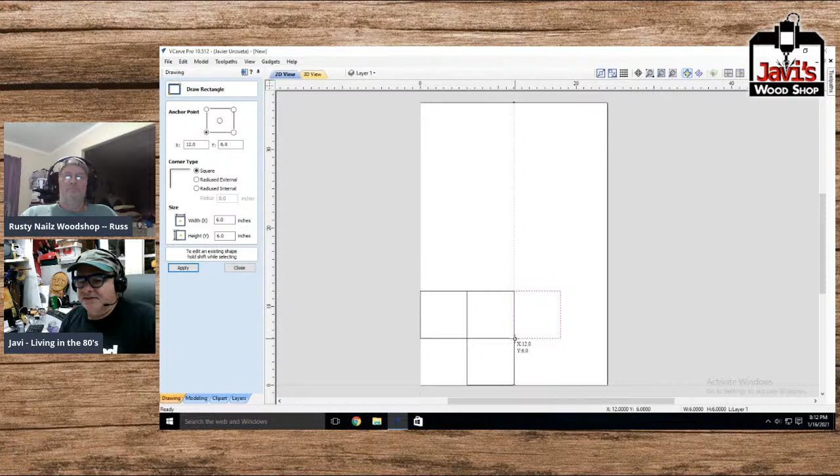And then another one here. And you know what, just to make it complete, I could do this one. This one is optional, by the way, the top one. Now, for those of you that have built boxes out of cardboard, you know all you have to do is fold these 4 up, and this one over here is the lid. Okay, so that's nice and simple.

Let's just get rid of this one because we're just doing a simple box. We'll worry about the lid later. Simple box, 4 sides on the outsides of the cross, and the centerpiece is really the bottom piece.

All right, now what are we going to do? We're going to do the following. We're going to create lines because I don't want to waste time carving out every single thing. So we're going to create a line from here, actually above here a little bit, all the way down to below here a little bit.

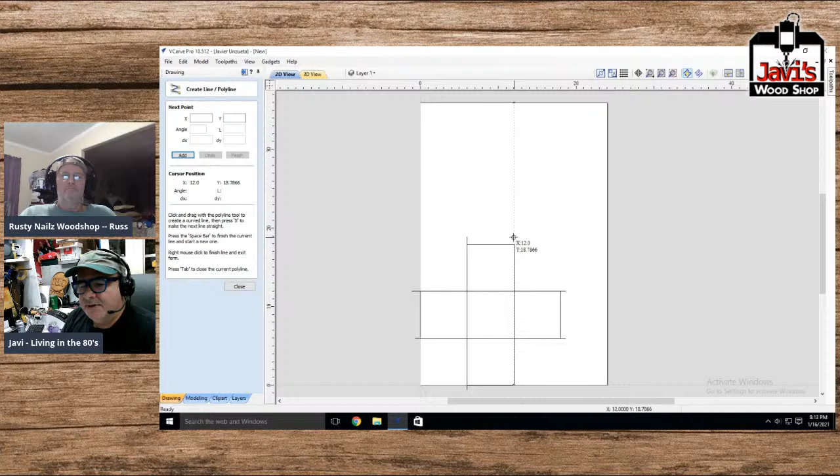And then hit the space bar, create another line from here to here. Space bar, a line from here to here. Space bar, a line from here straight down to here.

Now the reason I did these lines is the following. I'm going to select, I'm unselecting, by the way, the cubes. And I unselected lines by accident. Okay, I'm just selecting the 4 lines that we made.

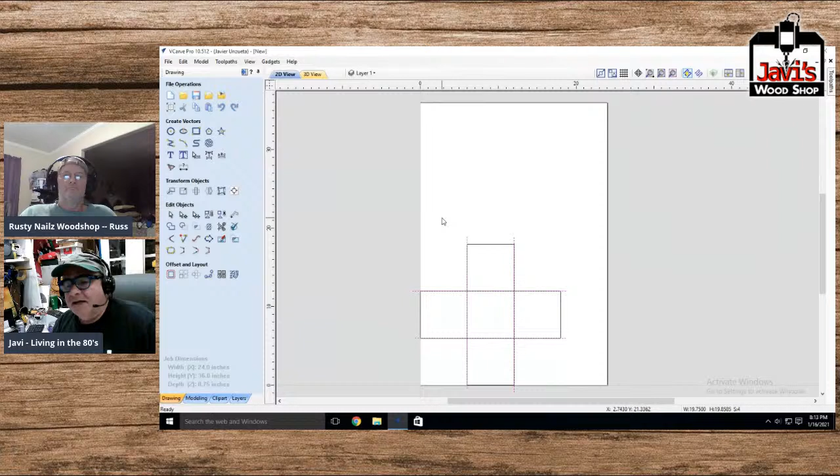You notice where they are, you can see them. Let me zoom in. Here we go, you can see the 4 lines cross the boxes here.

All right, so now let's go to the toolpath, and we'll start our first setup, which is, first of all, let me lock this down. Okay, we'll do a profile path.

And we're going to cut almost to the edge, to the end. We're not going to do a full depth of cut. We're going to do, let's say this was a 3/4 inch deep piece of wood, plywood.

Now we're going to go 0.72, let's say. 0.03 of an inch higher. It depends how precise your equipment is.

And I'm going to do on the line. All right, I'm going to do on the line. I'm not worried about the passes right now. We could do this in one pass, but I am going to choose the V bit.

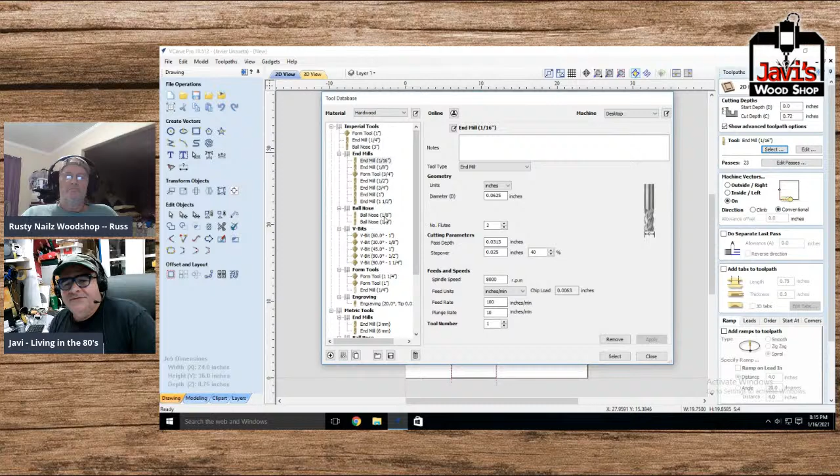And it's going to be the 90-degree V bit. Now I had a 90-degree. Oh, here, this is a 1.25 inch. I have a nice big wide one there. Okay, so there's our 90-degree V bit, and here's what it'll look like.

Calculate and reset preview. Preview all toolpaths. Boom. You'll notice that right now, if this were cut out, I could fold this up, fold this up, fold this in, fold this over.

And there's just enough here on the edges, just enough here on these edges of this bottom piece that I could just, if you're careful.

Now, what I would recommend is underneath the 4 lines of the edges, put a piece of blue tape. Line some glue right here, and then put some glue on the top edges, just on one side. So you could do the 2 vertical lines all the way up and down, and then just the inside horizontals. Then you could actually fold up the pieces.

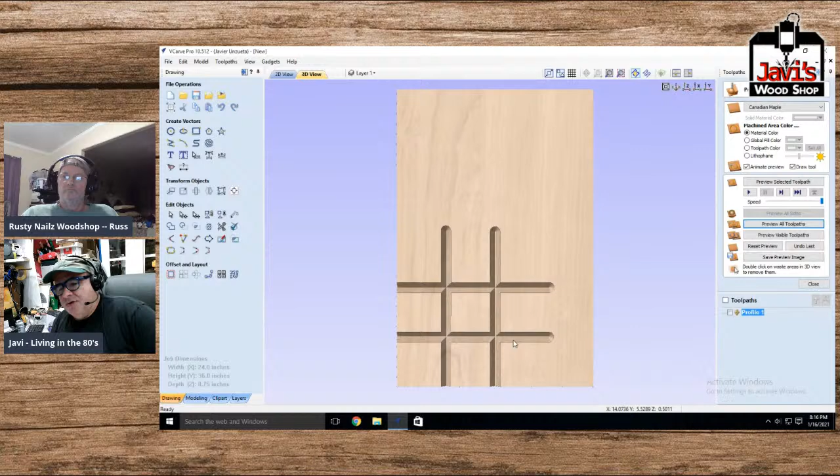Except we're missing one important factor, and that is we're going to take. Now I'm selecting everything else. I deselected. I selected all, but I hit the shift key. So I deselected the 4 lines, and I selected all of these. And what I'm going to do is unite them all.

And that's not really united. Yep, it is united. Okay, so let me show you what it looks like, because you can't see it because of these things.

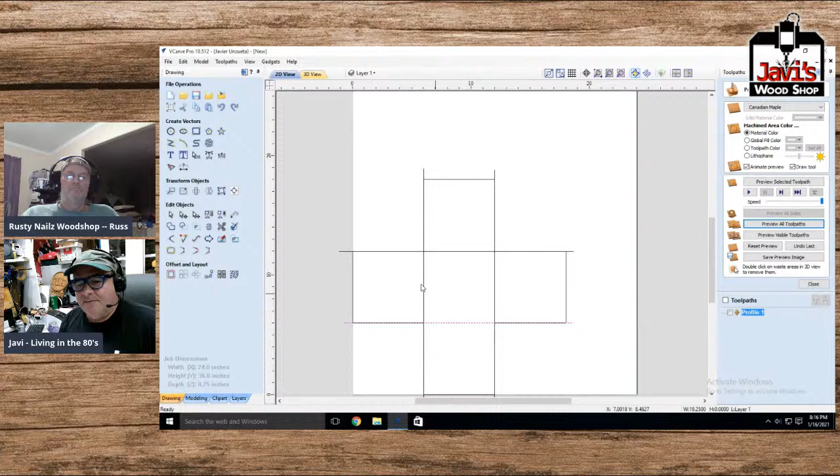So let me get rid of these 4 lines, or rather, let me move them to a new layer. Let's make the layer invisible, and we'll call this layer V-carve, whatever. Okay, we just moved them off to another layer.

Here's the outside, the outside's a simple profile, folks. Simple profile. So what we're going to do is take that, go profile, and it's going to be a 1/4 inch or whatever you wish to use.

1/4 inch end mill, select outside, and we're going to go the full depth, the 75.

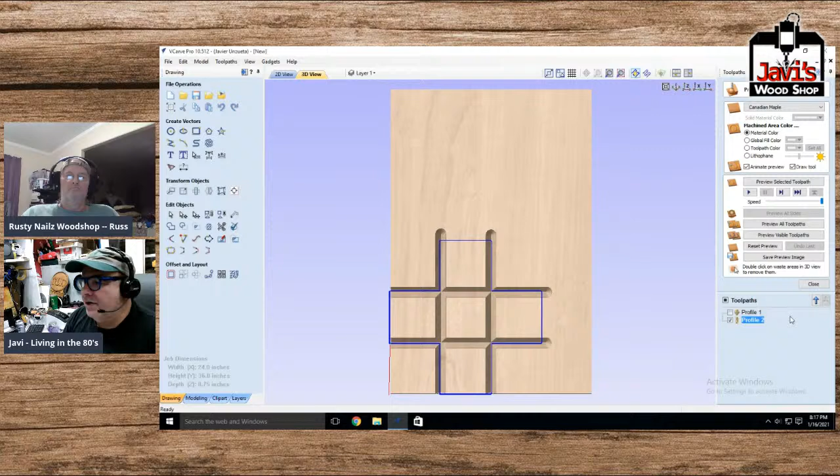Right now I'm not going to worry about anything. Okay, so reset preview, preview all toolpaths.

We just cut out, as you can tell. Let me zoom in here. We just cut out the box. So let's get rid of this, and let's get rid of this. You have your simple box, and you can see you have 4 flaps.

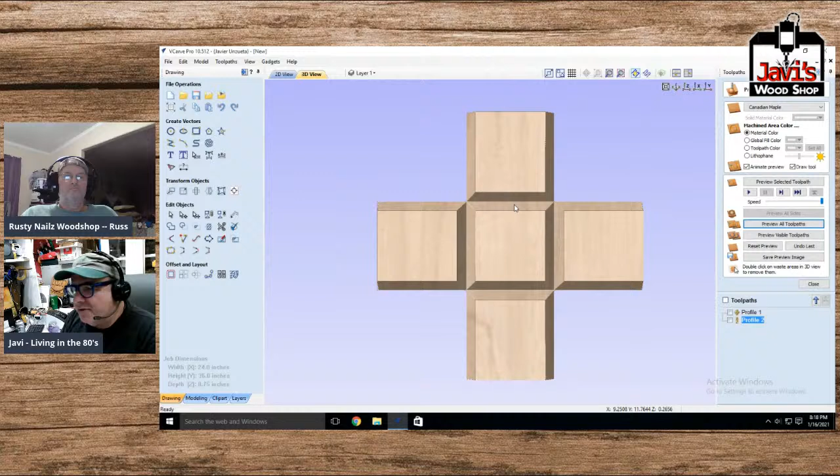Now, another way to do this. The only issue with this box is you will have to do a very minor cleanup. Let me show you, look at these edges right here. You'll notice, for those of you experienced, if you used a 1/16 it'll be less of an edge, but I used a 1/4 inch, so the radius is there. I'm not going to go crazy and do a bull nose here, because then it'll leave a tiny little niche at the end of the box.

But be aware that you might have to put a little bit of chisel into this thing before you fold it. But now, okay, so you've got the box to a position where you can fold it.

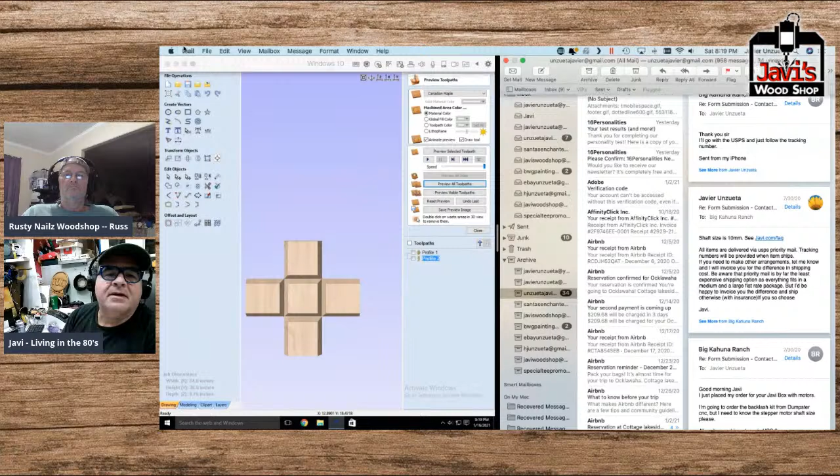So, oops, what happened here? Stupid mail, go away mail. And quit, I hate when Apple does that. There's another thing that bugs me about him, his mail takes over half the screen. Oh hey, this is important. No, it's not, shut up.

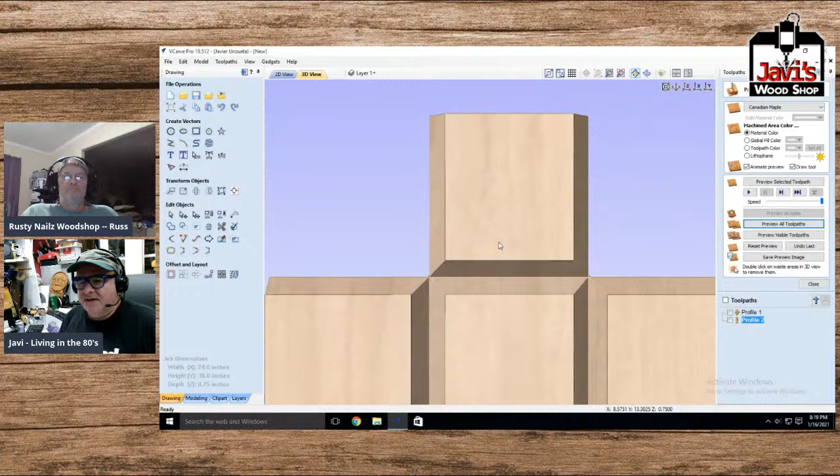All right, so folks, you saw the... let me see, where am I here? Here we go. So you see the box that we created. And again, imagine those little tiny rounded corners weren't there.

Put a tape behind this area here, put a tape behind this area, behind this, and behind that. In other words, basically the bottom pieces, and have your tape handy, because what you're going to do is raise these two carefully while trying to keep this edge, because it will snap.

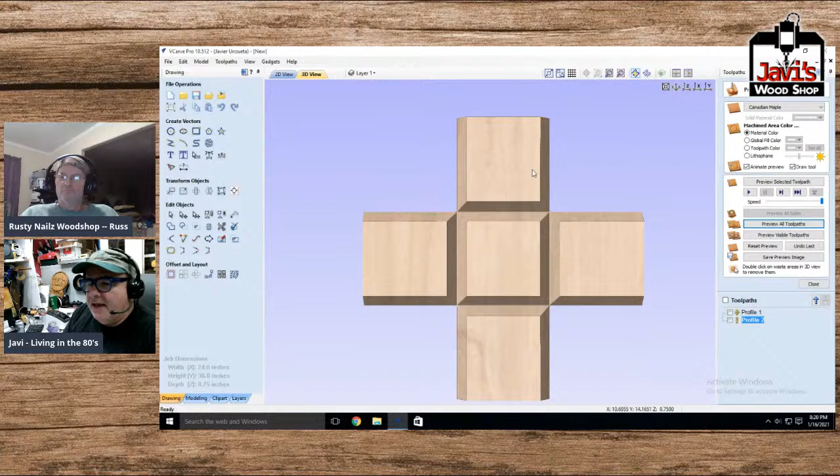But then when you line them up together, like I said, you put glue on either the verticals or the horizontals. I'll just, for now, put all the vertical side, a vertical strip, a vertical strip, and then these two little horizontals, because you don't need a second layer of glue on these things. And now you put them all together and tape the corners, let it sit for half an hour, you've got yourself a completed box.

What about the lid, you say? Well, we'll do that now. But this is a very simple box. Let me do one more thing, because this was a simple cube box. There's a lot of people that can't imagine how to do one of these with longer or thinner sides.

Well, that's very simple. There's two ways to do it. Number one, you could take this right now exactly as it is, and let's say you wanted to make a 4x6 box. Well, guess what? It's a simple scaling issue. You could scale it now.

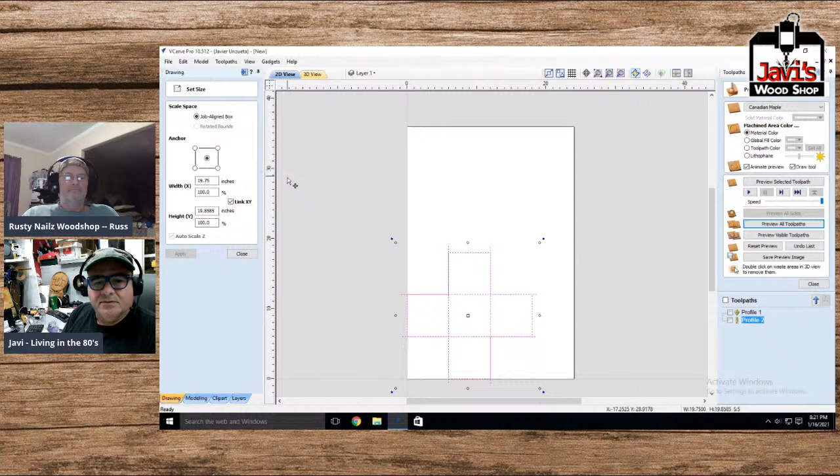Let's go to the scale, and we'll scale it on the bottom. No, let's scale it in the middle, we'll move it later. Scale it, and I'm going to scale it. I'm not going to link the X and Y, take that off. The width, which is the X, I'm going to shrink to 66.67.

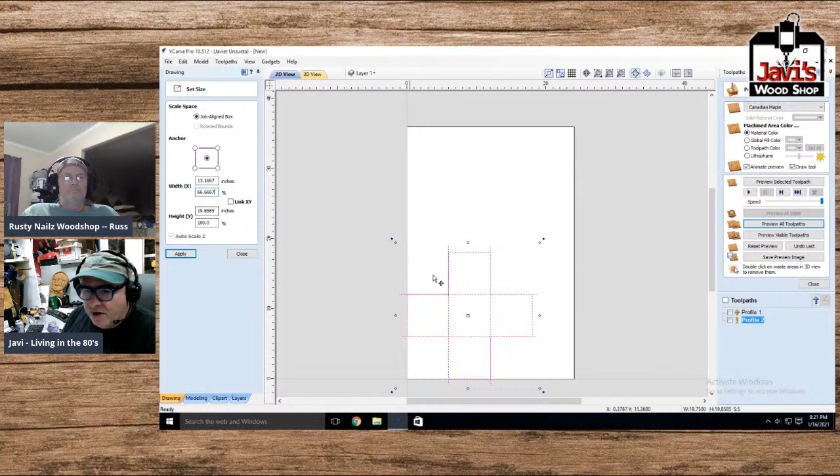It's basically going to be 2/3. 2/3 of 6 is 4, and I'm making a 4 wide by 6 long box. The other one, 100%. Apply. There it is, it's just that simple.

So rather than walk you through an entire build like this again, I'll just point out, hopefully you can see something about this box that's wrong. And that is this area.

Sorry, let me... yeah, I forgot, I had to use... let me undo this real quick, because we can't do it while it's complete. There's one problem that we face with it.

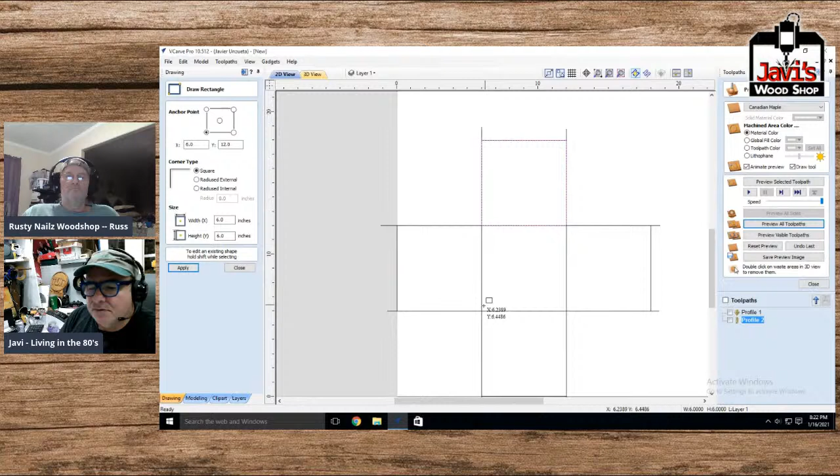Let me go back to the... let's see, 6x6, here we go. 1, 2, 3, 4. Let me get rid of this.

Original cube, and let me do that last one. All right, so... it's 0 here.

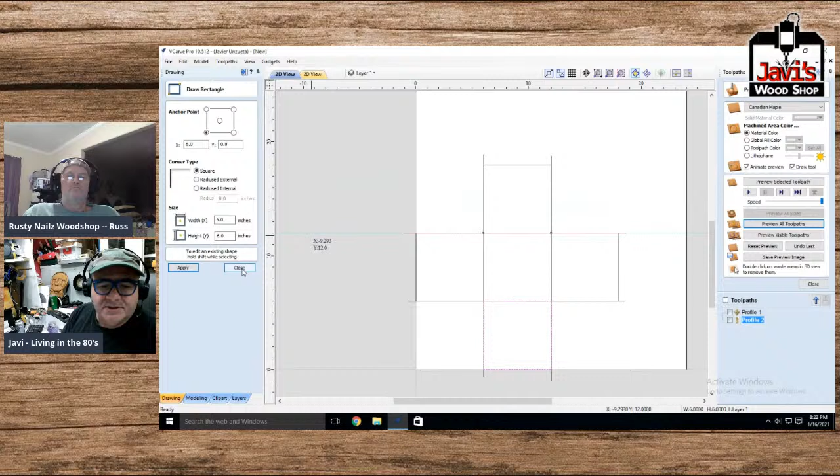Okay, so we're back to our 5 individual cubes, and the reason why I wanted to do that is because we need the 5 individual cubes. Let me go back, we'll scale again like we did, let me do it from the left this time. We'll scale this at 66.6667%, whatever, and now let me move this over here.

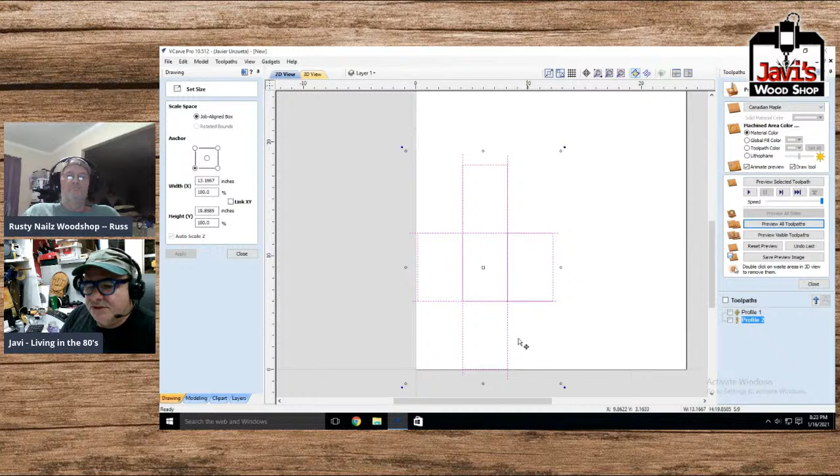Okay, so we have our box. Now, if you close it in, well this is nice, it'll be 4 inches high. This is 4 inches wide. But guess what, these have to be 4 inches high. And if you fold them up, you're going to have 2 pieces sticking up the wrong way.

So this one, we just shrink this way again, 66 point, the same percentage that you did. Boom. And then this one, from the top, we shrink it. Now this is the easy way of doing this. You don't have to have these lines this long, you could just simply shrink them.

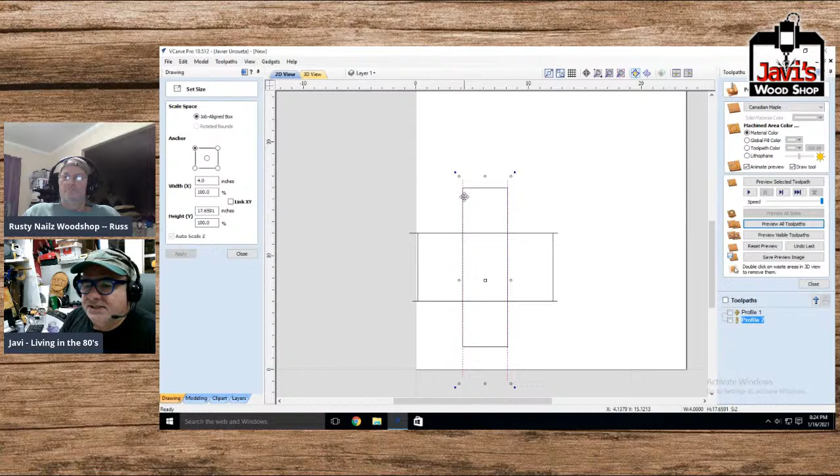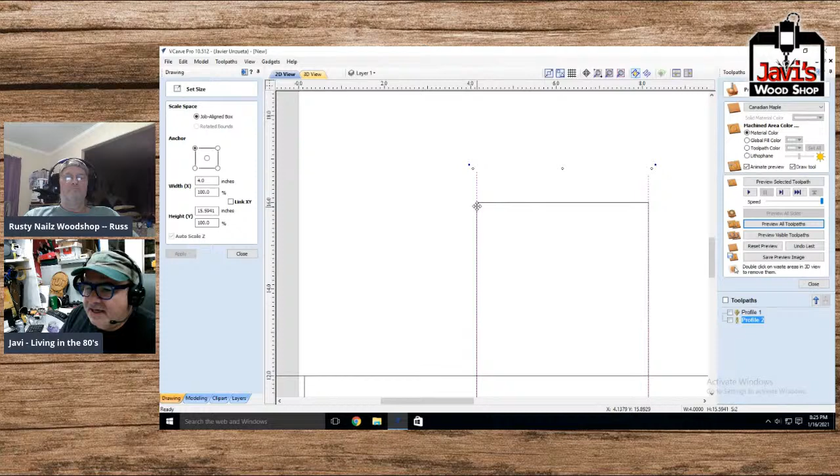You want the lines to extend a little bit, okay, and the reason being, I'll show you now. The reason you want these vertical lines over here to extend is because imagine your V groove bit. If you stop it here, you've got a V groove here and here, but well, you're better off having overlap. So when you cut this one off, it's going to form a nice, simple edge.

I mean, it kind of really doesn't matter, but imagine your V bit cut, if it stops right at the edge... well, it looks like it gives you a good mitered edge. It would be a good mitered edge, yeah, I was looking at it again, and it would be a good mitered edge. But I always, when it comes to ends like this, I always like to extend it because you never know. Sometimes it gives you a good edge, sometimes it doesn't. But another wonderful thing is you get to...

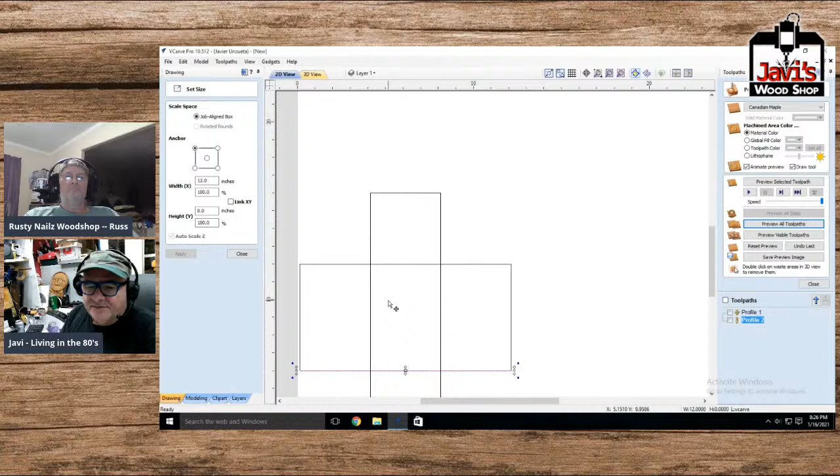Now it's very difficult to grab the edges, you grab this one, and let me group this. Grab this one and this one. Group again, and then both of these. Good, group. All right, so now they're all grouped, and I will select everything holding the shift key.

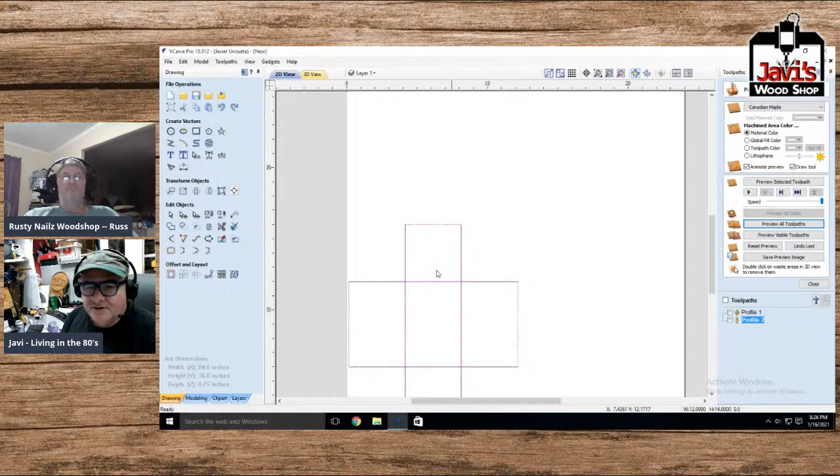Now I've selected the other box. I will weld it. Now I just took out the middles, but there seems to be a problem here.

Say hello to Marcello, he just joined us. Hey Marcello, how's it going?

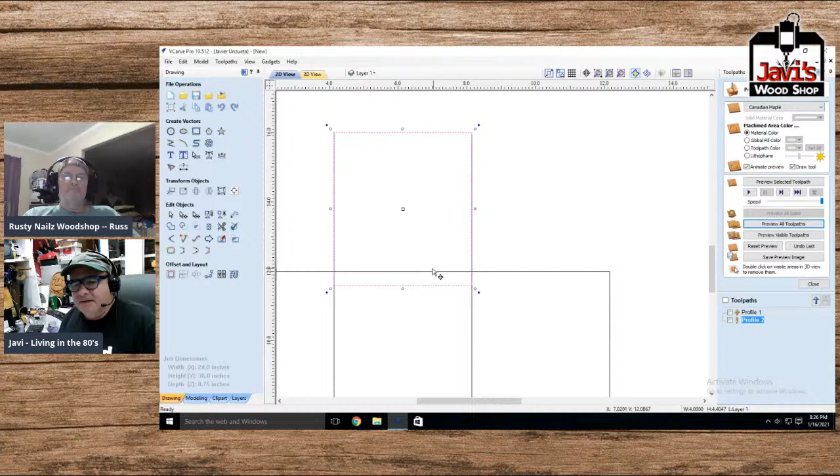Let me extend this one, and then that way I can grab that original one. Wait a second. Okay, so then now I do this, and then I do this. All right, I just made my cross again. And again, it's, as you see here, the height and width.

Well anyway, let's go ahead, we have our tool paths. So let's do the profile, will be there. Profile 2 will be there. And now we reset the preview and preview all tool paths. All right, so it did cut okay.

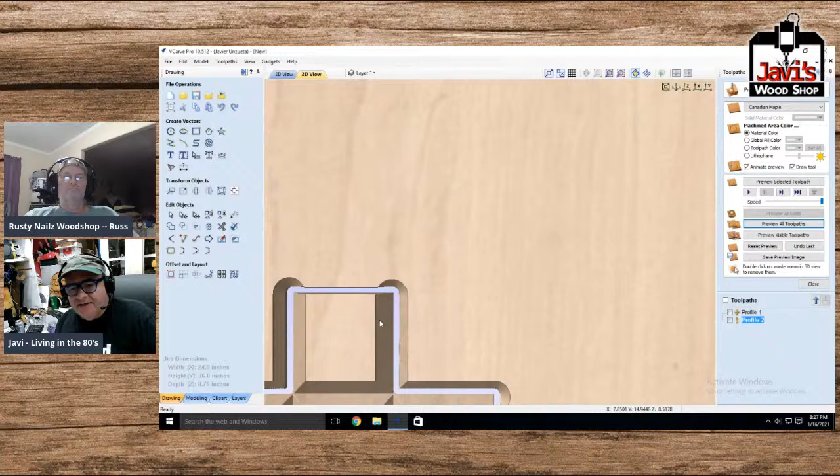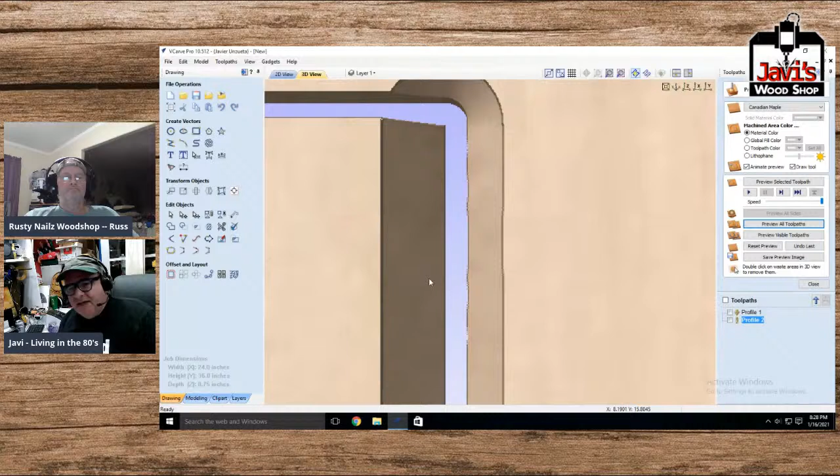I mean, obviously it's not a problem, but in some cases you're going to find that you do not want to cut it that close. Because if you stop right here, basically right now, the way we have it, that V groove bit, it stops right here on this tip, which is fine here, a little bit less, and there would have been a curve here. So clearly this is fine, but don't take any chances, because while your machine is fine, you might as well have a little extra play.

But anyway, getting back to it, I just like to always have a little extra play when it comes to those kind of cuts, particularly if I'm doing something like with an end mill, because obviously if I did this with an end mill and I stopped here, this piece here wouldn't have a straight edge, it would curve off this way, which if you're cutting it, no big deal. I'm sorry, end mill, I didn't mean roundover. But anyway, I digress.

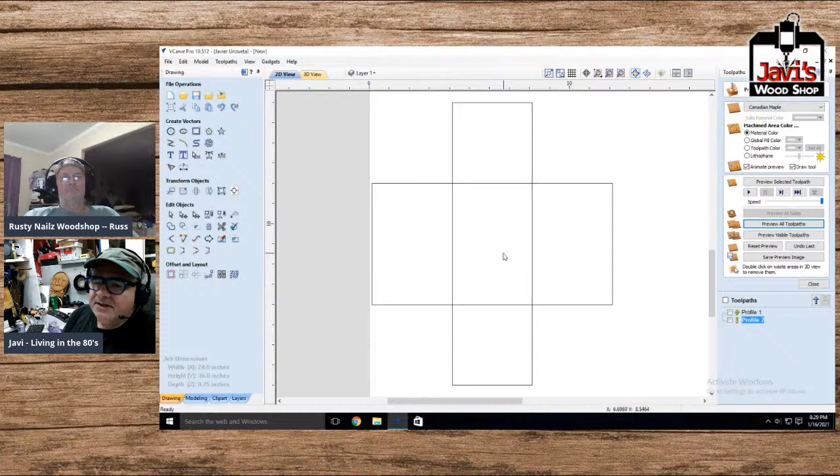So the reason I made this smaller is to show you, I'm not going to create one from scratch again, but if you wanted to create a small box, the easiest way is to make it a square like this. In fact, this also works. Let's say you want to create the 4 sides of the box, you want to know what the 4 sides are. I mean, most of us can pretty much commonsensically know that it's 4 by 6. So you've got a bottom that's 4 by 6.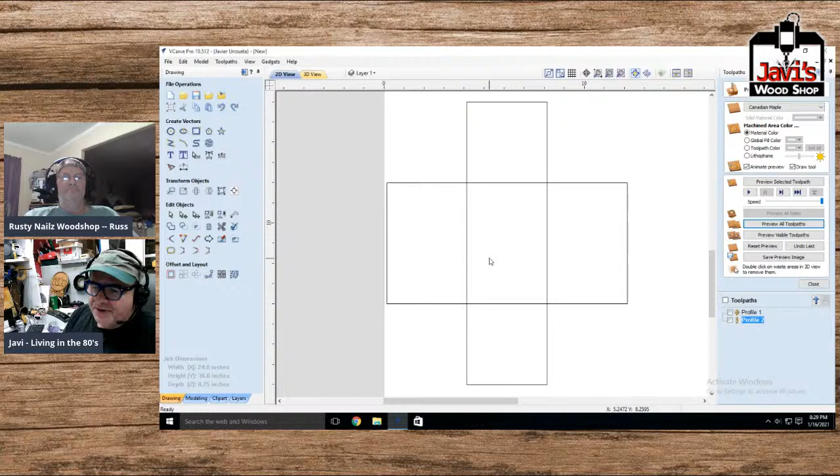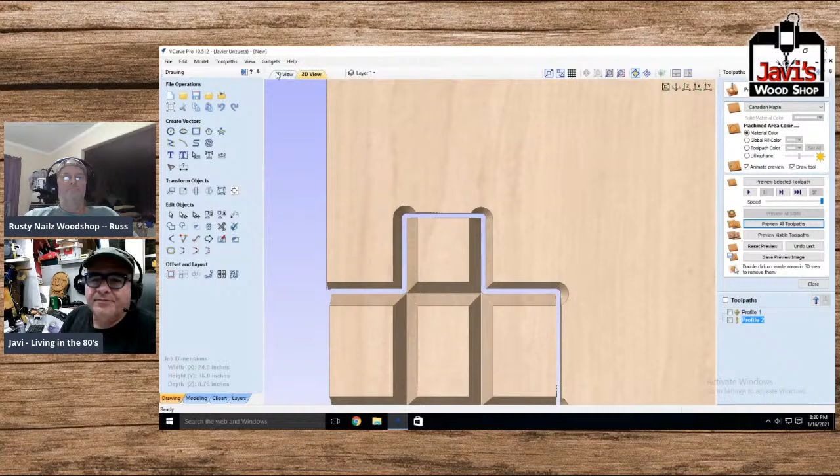You've got the side. Now, what if you wanted this to be 2 inches tall instead of 4 inches tall? Now you have 3 different dimensions. You have the 4 by 6 base, you have a 2 by 6 and a 2 by 6 side, and you have a 2 by 4 and 2 by 4 side. And then it gets even more complicated because what if you're not doing V grooves like I just did and you are overlapping them? Where do you overlap?

Now, and this is where it gets complicated with boxes. Let's say I have... I'm just going to draw the 4 sides of a box here and pretty much get rid of everything else.

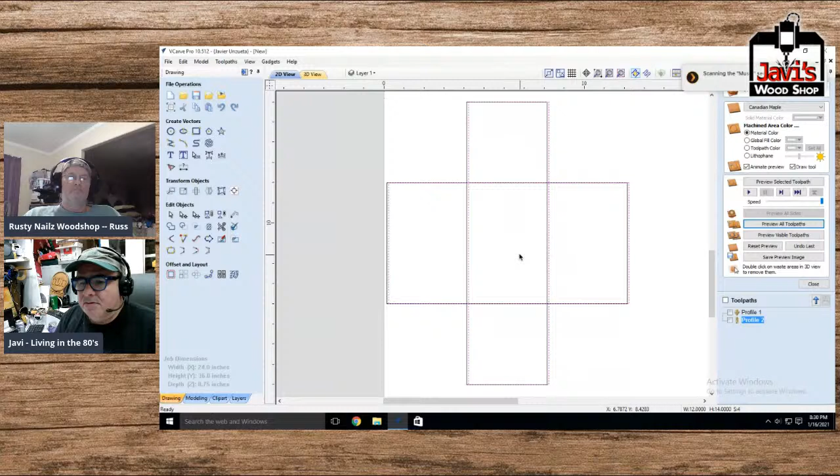Okay, that we can get rid of. That, that, that, that. Shoot. Just want to get rid of that.

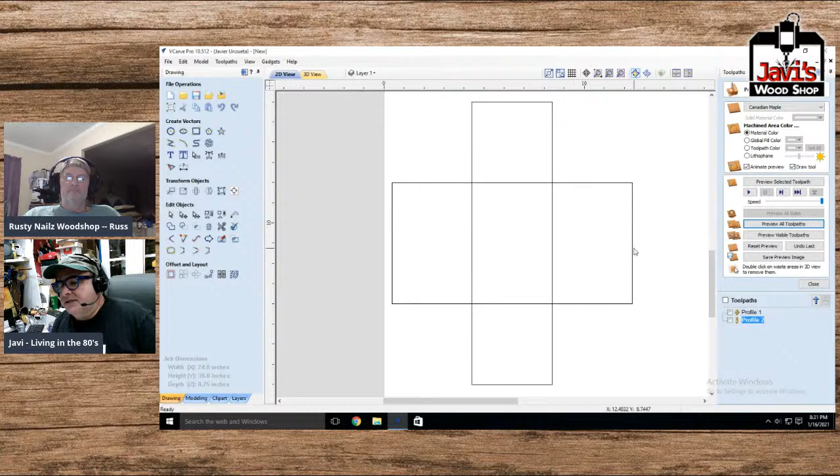All right, so we have our 4 individual boxes. We have the middle one and we have the other 3. So let's say, like I said, you wanted it 2 inches high. So now this has got to be 2 inches, this has got to be 2 inches, this has got to be 2 inches.

The advantage sometimes of doing it this way is that it's got to be 2 inches. Okay, so this is fine if you were going to do this type of box, again, this type of box with the V grooves.

But if you're going to do an actual box, just cut it out with a table saw, or have the router cut a bunch of squares, now you got a problem. This is 3/4 of an inch thick. If you made a box like this, if you can follow me, you're basically going to be missing a corner here, a corner here, a corner here, and a corner here.

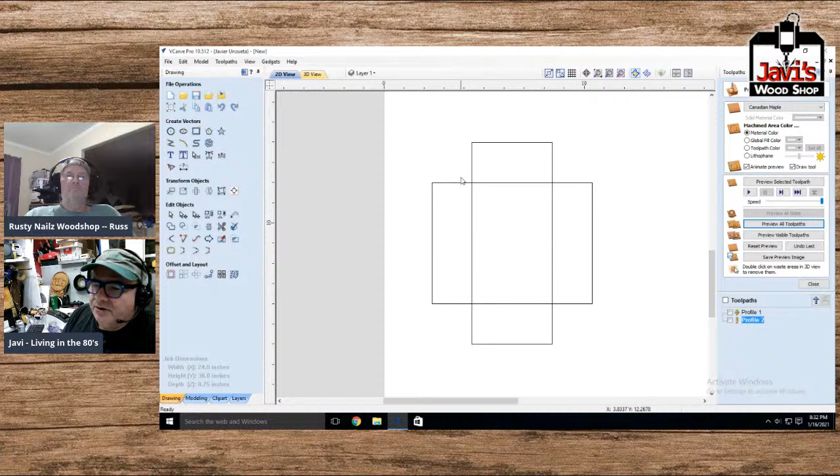So you have 2 choices. You either make these 3/4 of an inch longer. I'll just assume that's 3/4 of an inch on both sides. And then that way these can come up, and again, this will be flush with these.

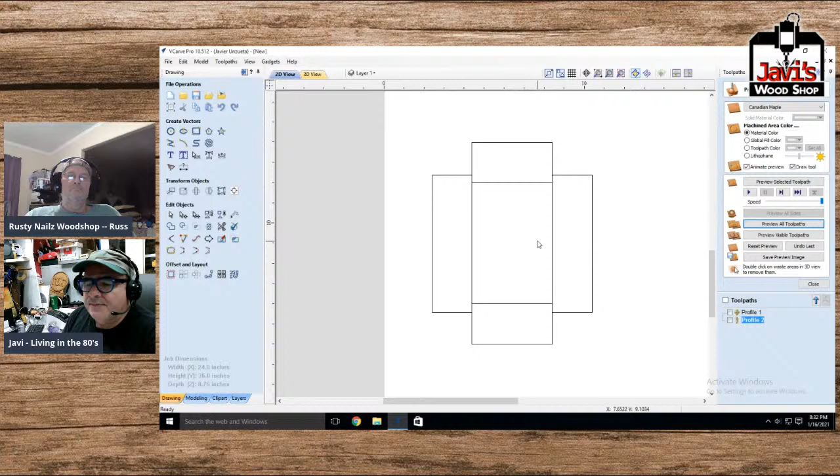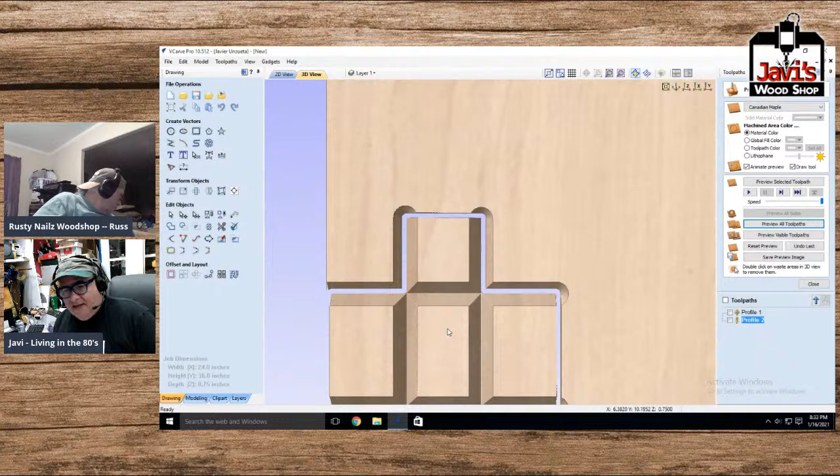Anyways, I'm not going to get into the logistics of making a box, because hopefully you guys know how to make a simple box. But the reason I'm going over this is for the few of you that have difficulty with this: that earlier lesson with this way of making a box, combined with last week's really simple method of just getting a piece of wood and hollowing out the middle, those are 2 ways of making a box, the 2 easy ways with a router.

Now there's one more thing I can share with you guys, for those of you that have ever worked with bandsaws and made bandsaw boxes, that's a whole other technique, because you could actually make it not so much with the router, but more with a bandsaw or with a very sharp and slow scroll saw.

You could get a thick piece of wood, carve out whatever shape you wanted, and basically you have your top, bottom, and sides. Instead of working with a box this way, you could do the same thing here, get a thick piece of wood, since your router could do 2 inches. Mine does. So get a 2-inch thick piece of wood, carve out the profile of the outside, but first hollow out completely the inside.

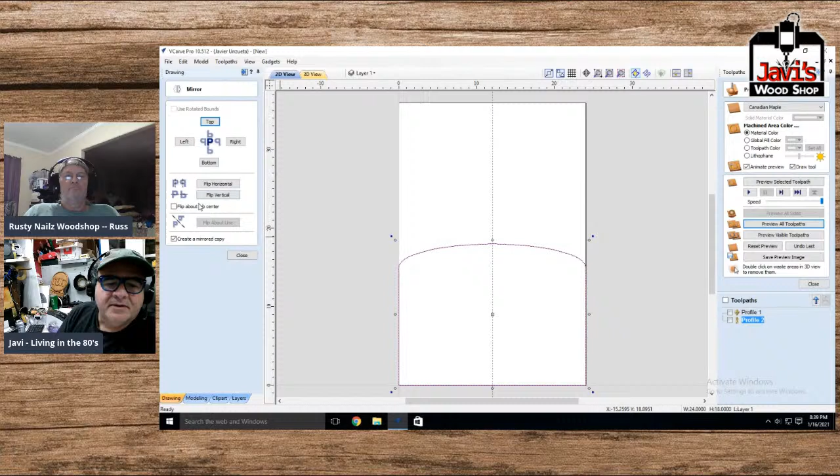All right, so now we close, we take our cutting tool, we'll get rid of this, get rid of this, and we have just made the sides, the 2 sides of the box. What, there's only one there? Oh that's easy, we take copy, paste, and then flip it about the job center vertically. There it is.

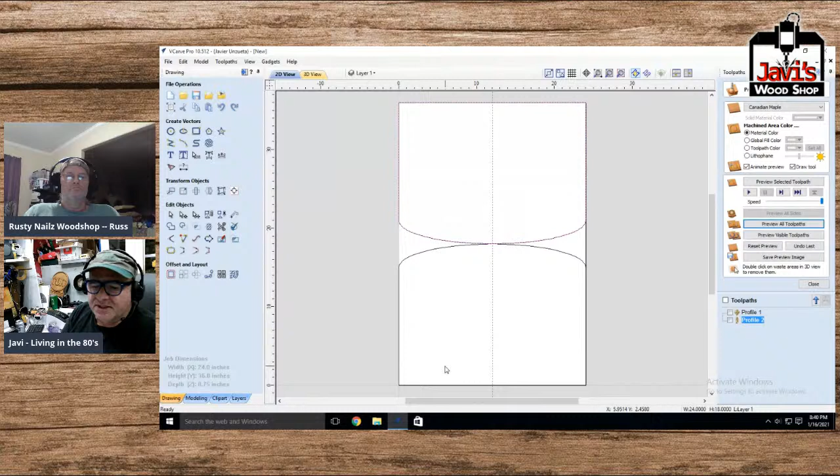All right, so we have our two sides. I'm not going to bore you, but basically cut your two sides, okay you're done. Another piece is clearly minus twice the width — let's say 3/4 inch, so it's going to be 1.5 inches less. It's going to be a rectangle, I'll draw it for you here — 2 foot by 1.5 inches less.

So we're looking at 34.5 inches. There's your bottom. Why is that your bottom? Because your sides are going to fit in your bottom. Now you got to cut your front, you got to cut your back, and that's another simple thing.

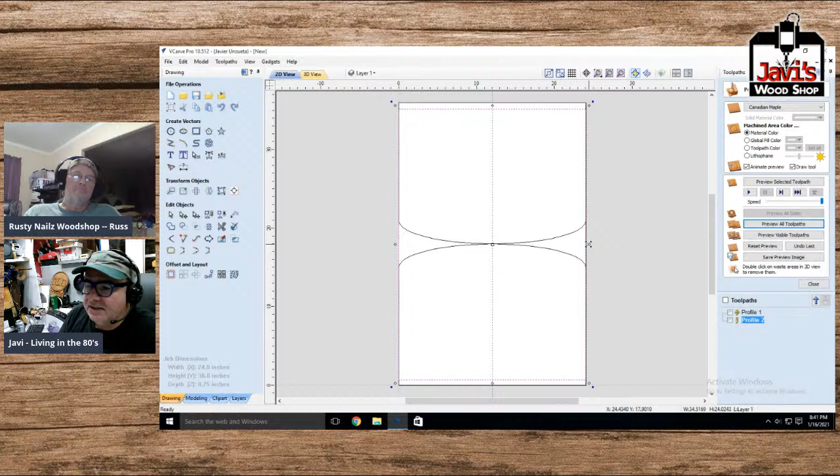How high are you going to cut them? Well, that's pretty easy. First let's take our... actually I don't even need to do that, I already know the height here. The height from here to here is 15 inches. So clearly we'll just do this 15 inches. And there's our side, our front and our back.

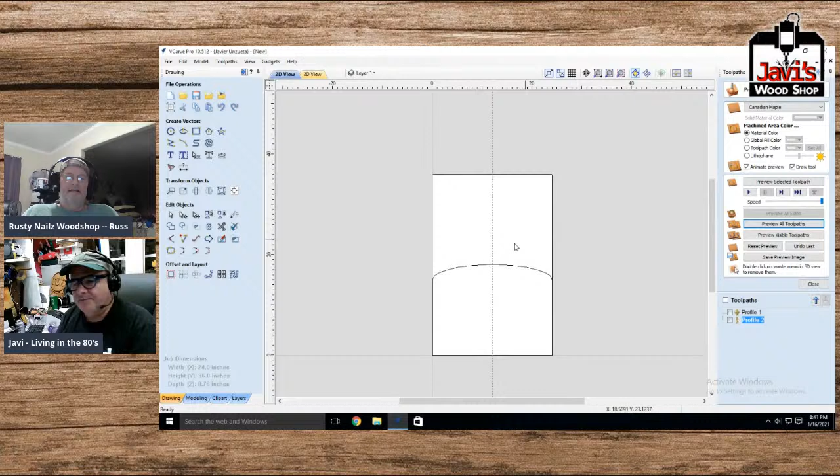All right, so now we have our front, our back, side to side, and our bottoms. All right, what do we do with the rest? Well, now comes the complicated part. But it's not really that complicated when you think about it — the question is, how small do you want these things to be?

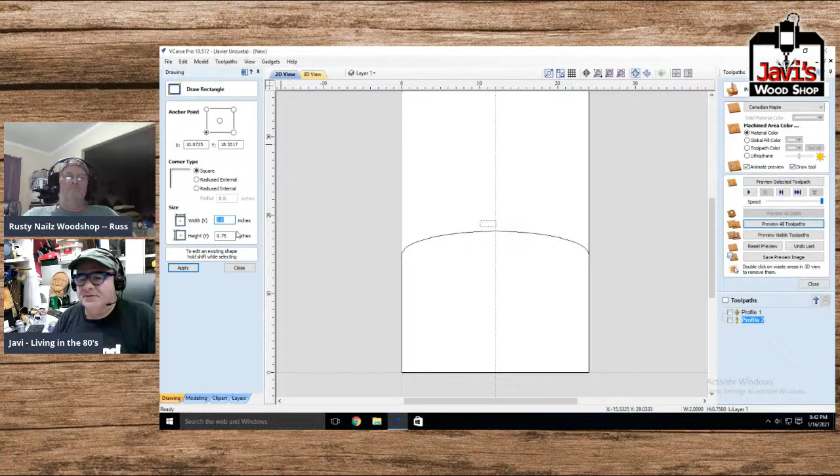So all you got to do is get a nice little, say, 3/4 inch high by 2 inches wide each piece. All right, so now they're 2 inches wide. All you really have to do, and this is the easiest part, is just cut a bunch of them and staple them, and that's it.

But let's say, would you bevel them? Yeah, and that's the next step. All right, so now you know how long the box is — the box is 3 foot from edge to edge. So imagine, if you will, you are now putting these pieces. Let me just put a few of them here just to show you what we're doing.

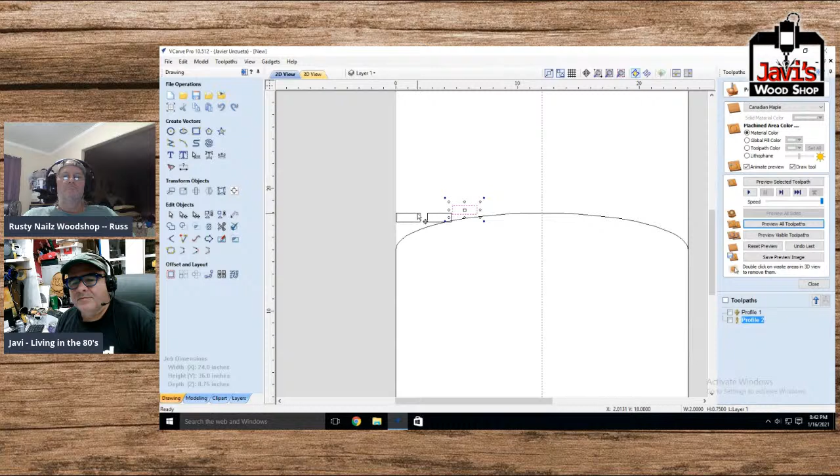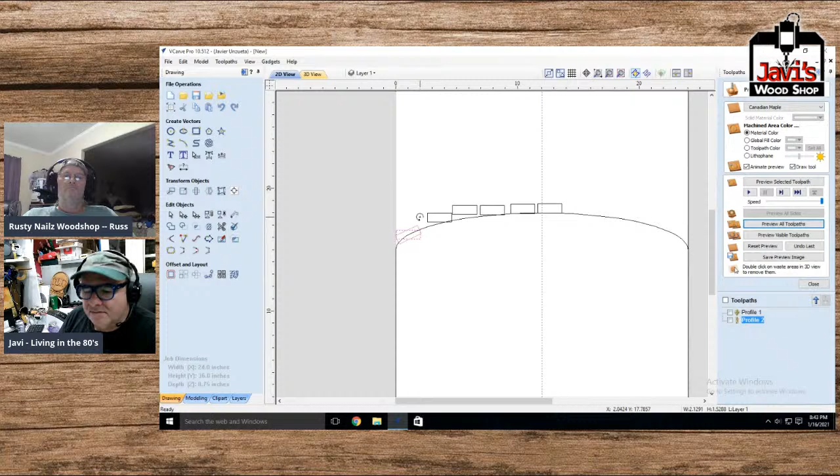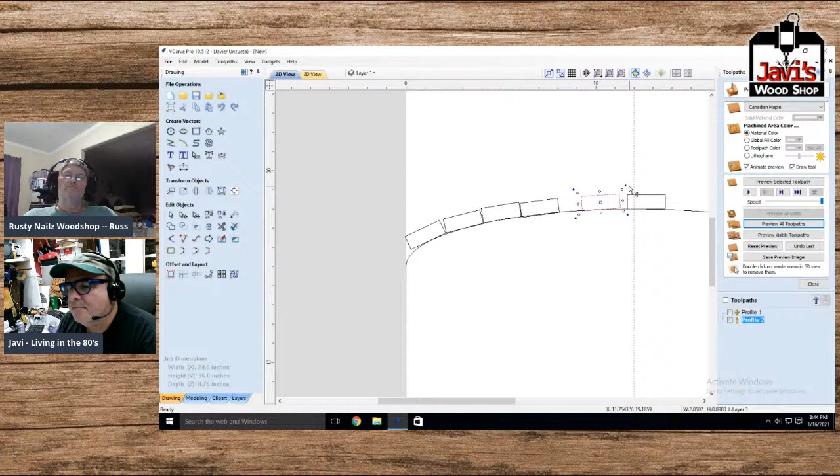If you look at the side of the box, let me scroll this down and pivot it here, to about here. So you pretty much get the idea, you know what you're doing. We're just doing one of these things, so I'm giving people at home an idea of what we're doing. That's good enough for now.

By the way, once you get to the middle, like I just did, it's a simple matter of duplicating these. But this is just for illustration purposes, because we're not cutting anything this small.

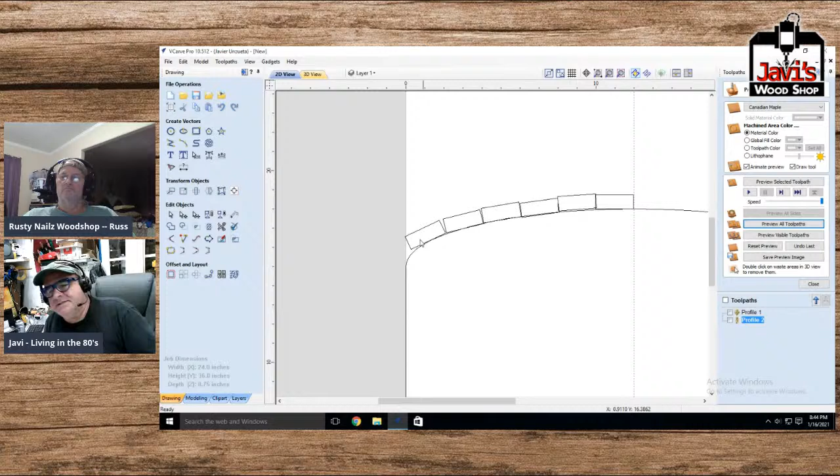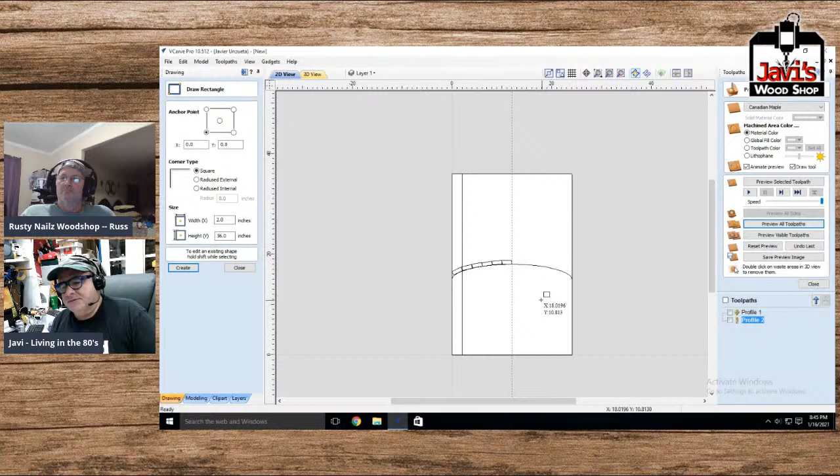What we are doing, though, is taking a 2-inch piece by your length - if you turn this to the side, it's 36 inches. So you're going to cut simply a 2-inch piece. Let's start at 0,0. We're going to do 2 inches by 36 inches. There's our first piece. I'm going to get rid of the rest of this box because you've seen it. Now this piece, and there's going to be quite a number of them like it, you're going to have to bevel it to a certain degree.

Hopefully you have a very small angle bevel, like an 11 degree. They do sell 11 degree V-bits. And if you do have an 11 degree V-bit, what I would highly recommend is obviously make this longer. Obviously it's not going to work because it's longer than my table, but assuming it works, make this longer.

Here's a practical reason why you want this longer. Yes, over here it's going to cut the air or cut garbage - you don't care about that. But here's what happens now.

I'm going to create a line here. Oh, actually I can't create a line. I'll do a square instead, a big square. And I will do a bunch of these - copy, paste. Why am I doing this the hard way? They do have a function for this. It's called matrix.

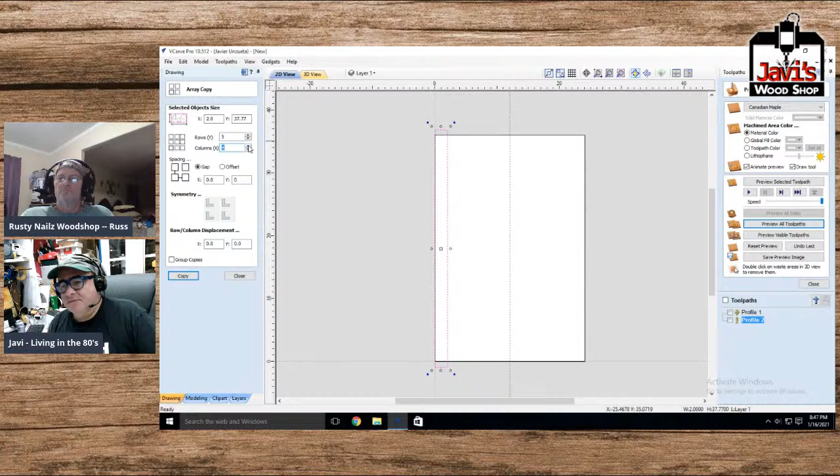Zero gap. How many columns? Let's see, what is it - 24, so we'll do 12. Boom, okay, we've just made our things.

Now what we'll do is, on all of these, we'll do a profile. In fact, it's so handy that I happen to have a profile here. So we'll do a profile, but not with a 90 degree V-bit. Let's select one - I don't have one here. Let's select, well, we'll make it a 30 degree V-bit just for now, but let me see if I can duplicate this.

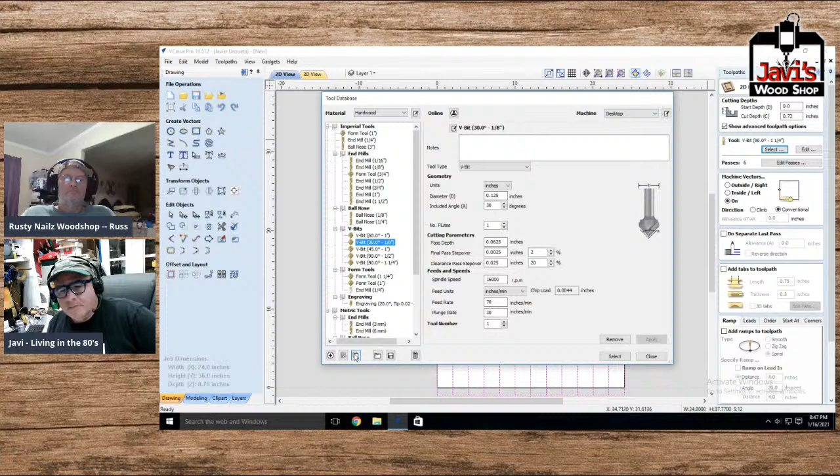Another example of how to make a tool, folks. Well, we're going to go ahead and make a 22 degree, which, remember folks, a 22 degree V-bit will have a side angle of 11 degrees. In other words, from one side to the other side it's 22 degrees, but from the middle to one of the sides, it's 11.

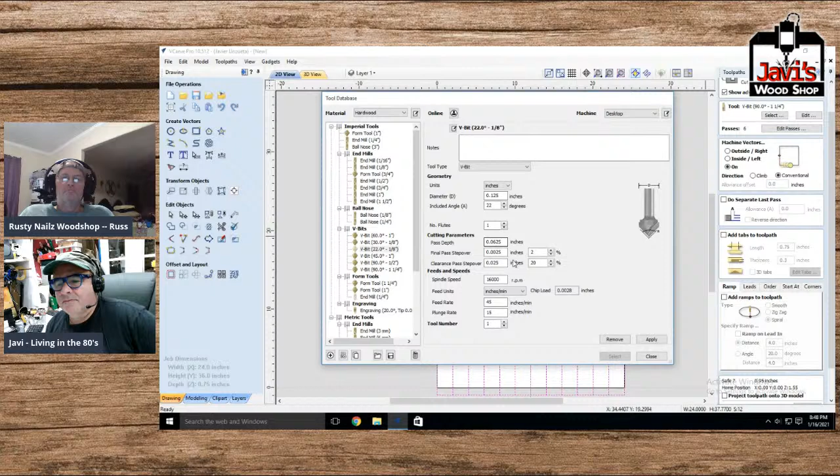Close that. All right, so we did that, and we'll make it the full depth, .75. Oh, what am I missing? There we go. Okay, so we have our 22 degree V-bit. Calculate, boom. So now let's reset and preview all toolpaths.

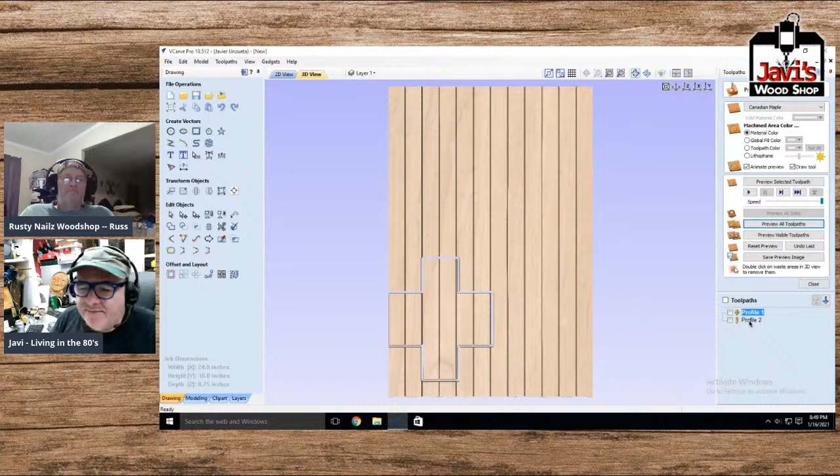We have, the second profile still there. Look how thin, look how beveled it is. So now, obviously you got to play with it because the bevels on the end are going to be different. Unless - let's see, how much time do I have? 10 minutes, I got just enough time to share with you a semicircular one.

Okay, so the profile, let's just finish this off. The profile is going to be this - oops, sorry, this outer one. Why isn't it there? There it is. Nope, that's not it. Oh, this is what I want. There we go. And so, calculate.

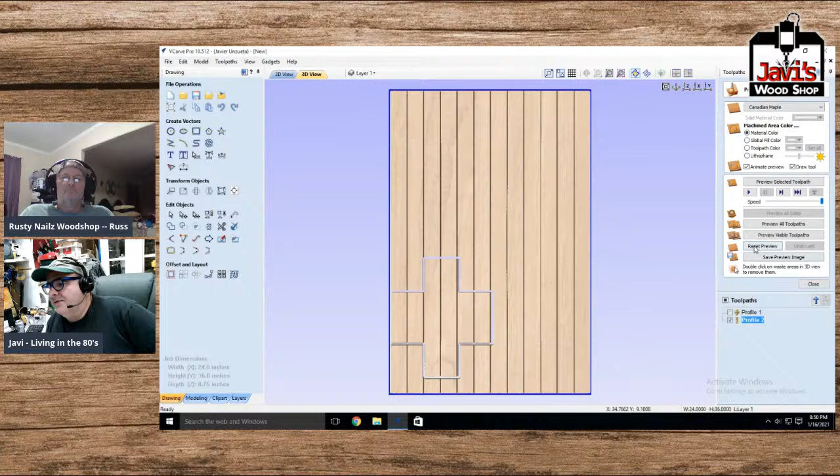Okay, so now if we reset the preview all toolpaths, we have all of them, and it has cut out - you can't see it, but it has cut out a flat piece. And this is the reason, folks, this is the reason I said this is very handy. Hang on, let me see if I can go to the edge here. This is the reason why you would want - let's say you have a big board, and now you're cutting out a profile.

If I were to have these boxes right at the edge, you just screwed up your piece, because now this whole edge has a bevel. You need this edge to be flat. You want the bevel only on the sides.

So look what I did. I put the bevel all the way around, but it's cutting air over here—well, I call it cutting air, it's cutting a scrap piece you don't even use. But here, you're not cutting anything on the left and right, but on the top and bottom you're shearing off those other little edge pieces.

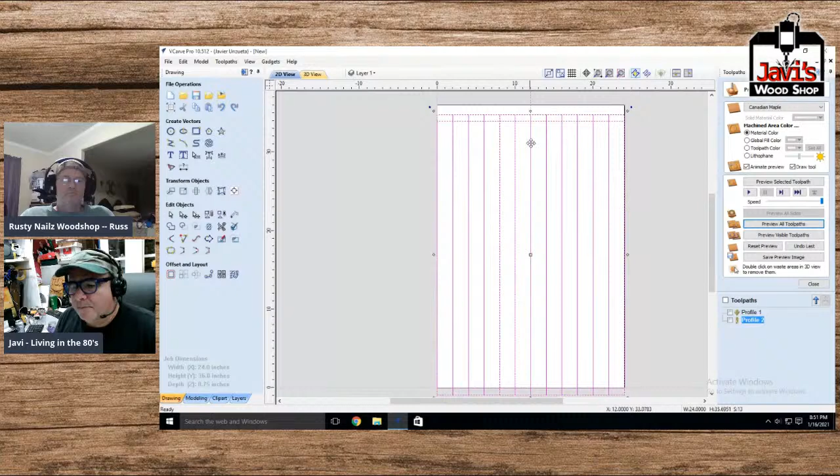Here, I'll better demonstrate it this way.

Hitch just joined us while you're thinking about it. Hey Hitch, how's it going?

All right, so what I'm going to do now is recalculate all toolpaths and then show you why I did what I did. You'll see how it bevels everything, right? Now let's go back up to the top here where we were.

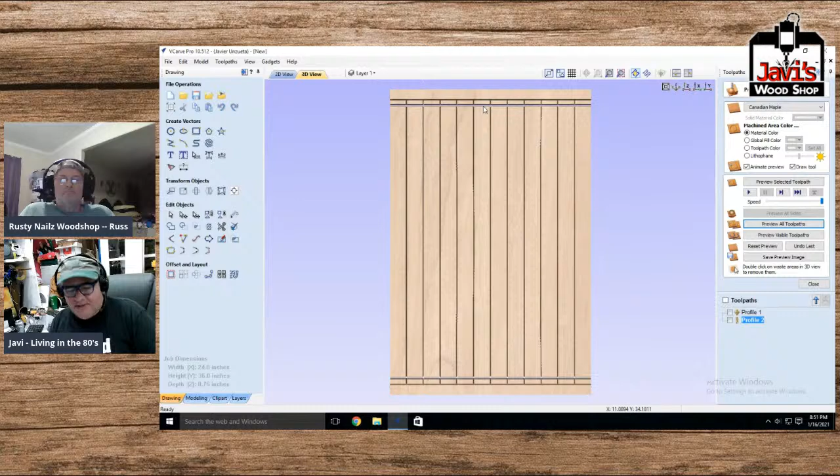If I were to just leave the bevel, this top part is beveled in here. I mean, I can get rid of this, but this top part is beveled, so I'd have a beveled edge. But what I basically did with the end mill is I sheared off exactly where I wanted it, the edge. So now this part's flat, so you can build your box top with that.

Okay, so now let's go back to the original box top. Let me go ahead and get rid of this. Let's quickly do a box. Now here's what we want to do: we want to make it—let's say we're going to make it completely circular.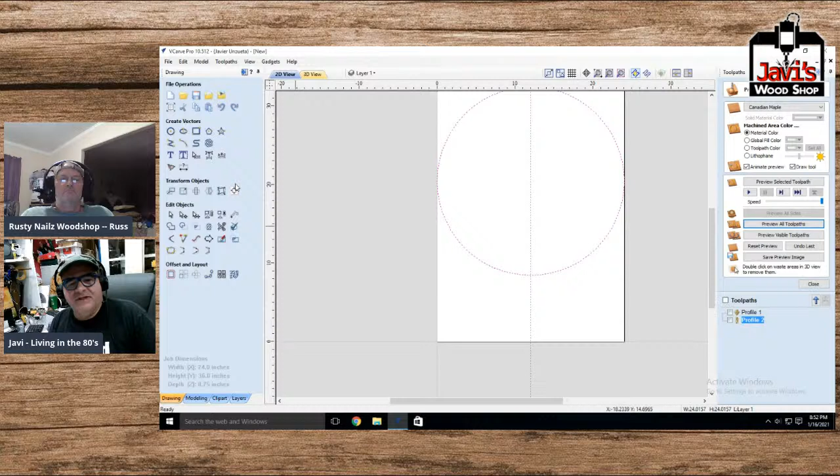That means I have a radius of 12 inches, which also means I have a height of 12 inches. So let's say I move this to the 15-inch mark, the circle. Well, let's say I create this here, so you got a little more space, and let's just go 24 by 18. Oh, that's a circle—I don't want a circle.

Hello Troy. I want a square. Who's there? Troy Pritchard. Hey Troy, how's it going?

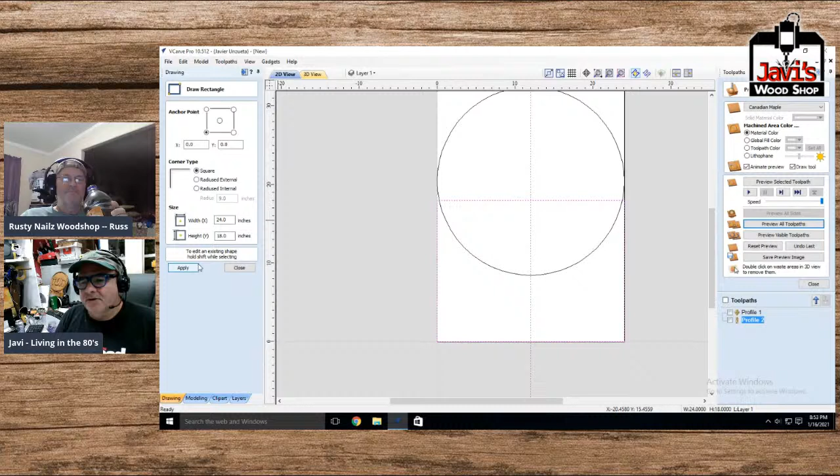All right, so let's say I do an 18 by 24, again with the rounded corners. Here we go, come on man. Let's say I do a square. Now I do the square. I have my circle, and I'll move my circle right to the edge, and I'll do exactly what I did before—take my scissors, cut this off, and now I have a rounded top.

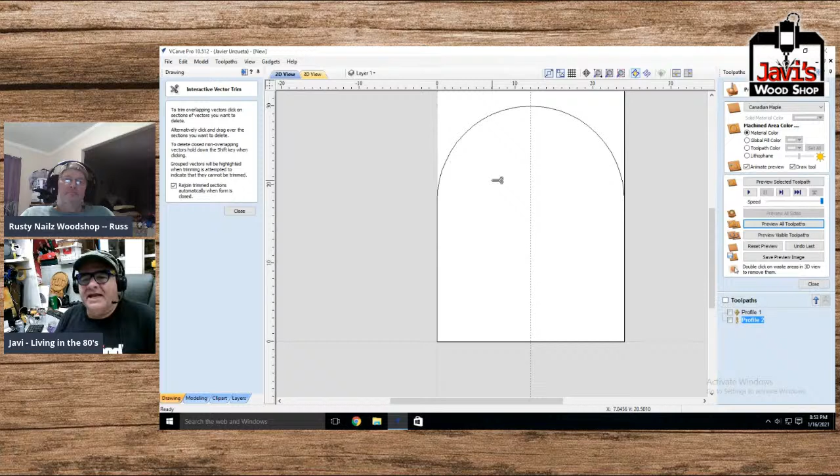Well, the advantage to this is that you now have a top that isn't a tight curve here and a slow curve there—you could actually do one bevel for everything.

Now, if you're at 2 inches, here, watch carefully what I'm doing—I'm drawing a line from here to here. All right, now I'm going to rotate. You know me and this circular copy tool—I love this circular copy tool.

Now this is where you might want to do a little bit of math. Okay, I hate to do it, but I'll run through the math real quick. Radius is 12 inches, all right. So let's get our calculator out here—our radius, no wait, hang on a second.

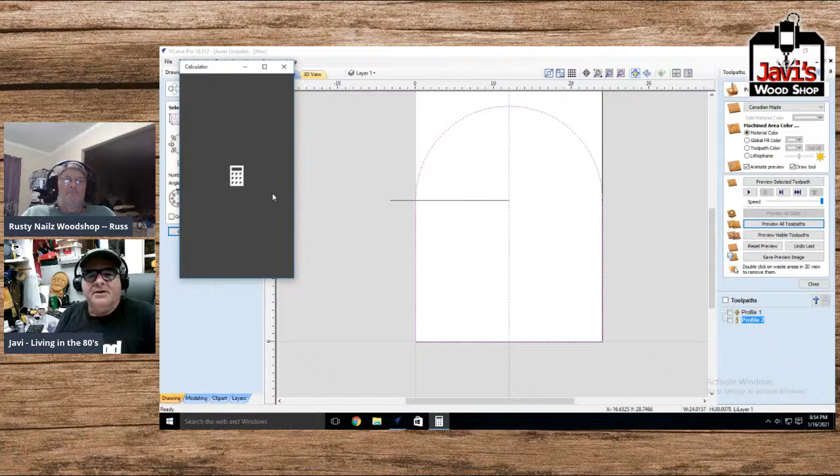Let me get the PC calculator—let's see if I remember. I just type calc and that's it. Yeah, there we go. Okay, so let's get our calculator here.

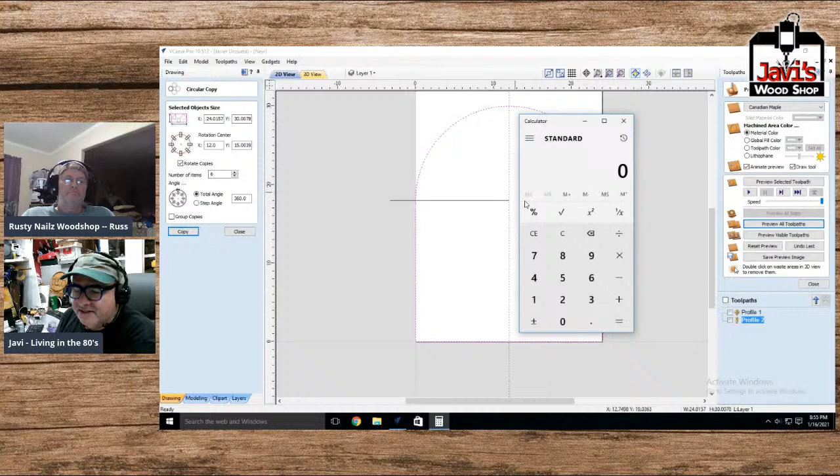And now we need to know, if you guys remember, pi d is the circumference of a circle. Pi d, pi d. Now the radius is 12, so what's pi r? Pi r is actually half of the circumference of a circle. R is half—it does translate, it does equate, trust me on this. So, 3.14159265358—I won't go on with pi, but basically pi.

If you have a pi on your calculator, even better. Times R, 12, so we're looking at roughly 37.7 inches. Okay, 37.7 inches, I'll just call it 38. 38 inches.

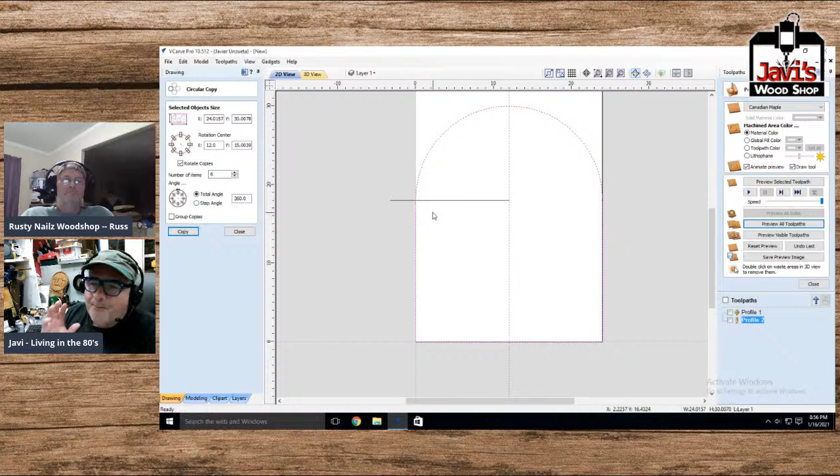Along this edge here, which means if I were to do 2-inch pieces, I would need 17 of them. I want to make it simple for myself, so what I'm going to do first—the reason I calculated it is because I wanted a piece about 2 inches, so you need about 17 of them for the top. Well guess what, 16 will work perfectly fine, and 18, making them a little smaller, will also work perfectly fine. And guess what, 18 is divisible into 360 nice and easily.

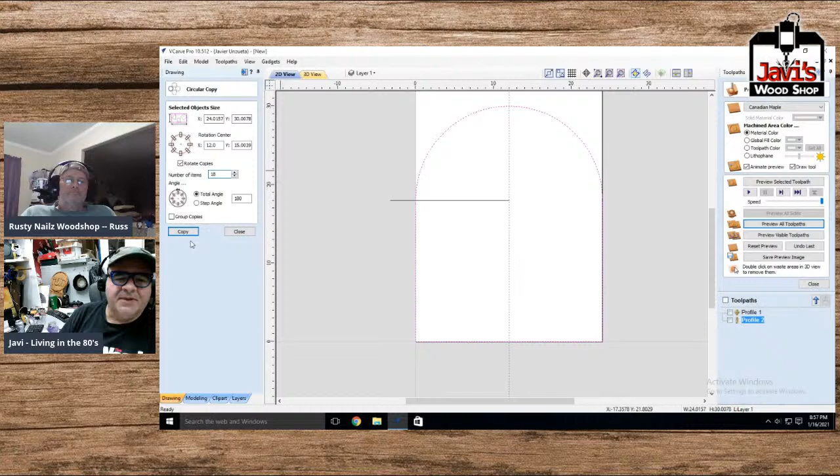So the step angle will be 18. Total angle is 180, and I want 18 items in there. Yeah, I'm rotating the wrong thing. Let's try this again, folks.

Now, the center that I'm doing it at, let's see, that's going to be 1218. Rotational center, 1218. Number of items, 18. I hope there's not too many 18s up there because I'm confusing everybody. 180, because I'm going from here all the way to this side. 18 pieces is what I want, so to approximate them being 2 inches each.

And then from on 12 on the X, 18 high on the Y. I want this to be the center of rotation. So copy, and it should, boom, go right there. Look at there. And actually, we want 19 because we want to include the last one.

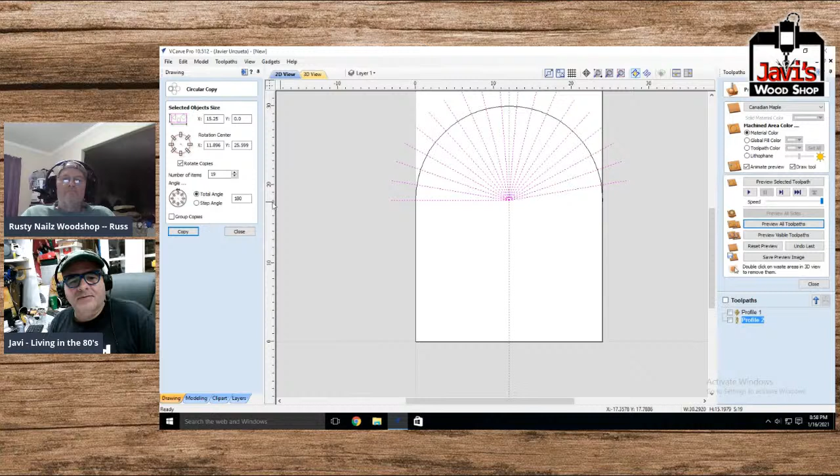Hey, wait a second, what happened? Oh, I know. No, see, total angle 180. 18 is fine. No, because it'll divide it.

Doesn't matter, 18. Now, the total step angle, another way we could have done it is the total step angle. We divide 18 into 360, and we're looking at 18 into 360 is 20. That's twice as many, we got to put that in half. So that's 10 degrees. 10 degrees times 18 copies is 180 degrees. So there you go.

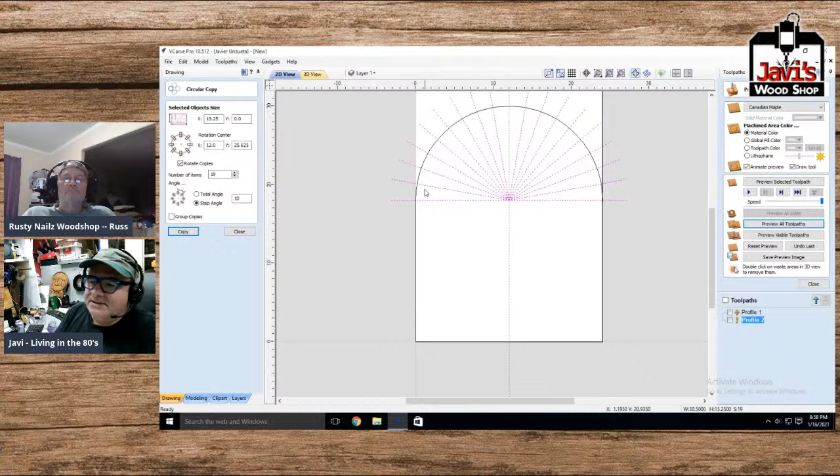Boom. And you know what? This time we could do 19 of them, and that'll go all the way to the 180. Well, anyway, this is a simple way. And now why are we putting these lines here? Because now we can actually zoom in and we can go from here to here.

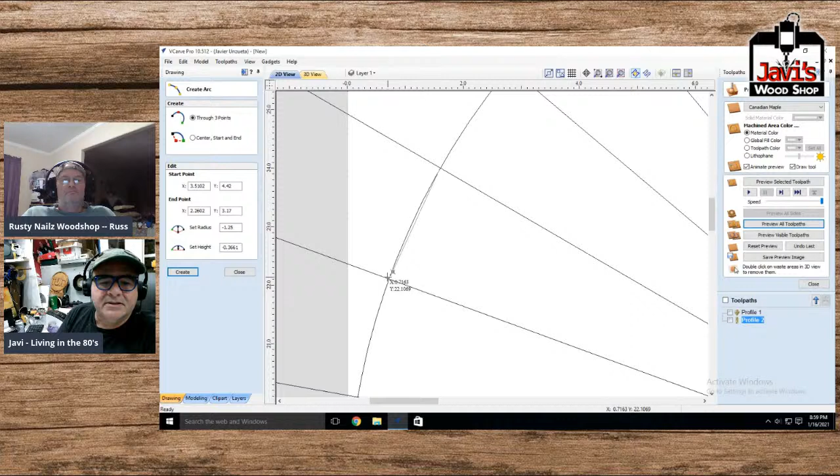Hang on, and we could see that the length, let me see, start point, radius, X and Y. Well, let me just, whatever. I need a line. There we go. From here to here. Length is how close did I come? 2.09, that's not bad.

You know what? I could fill that in with caulking. So, well, the bottom line is, you could butt them all together, and you could always make the edges a little higher. So now you got 2-inch.

And okay, remember, I just measured from this point to this point. Now, if you were to measure, say, from here, oh sorry, let me get my little line again. From here in a straight line to here, because remember, you're nailing off the top of the box. Now it's 2.1 inches. Okay, so really 2.1 is what you're looking at.

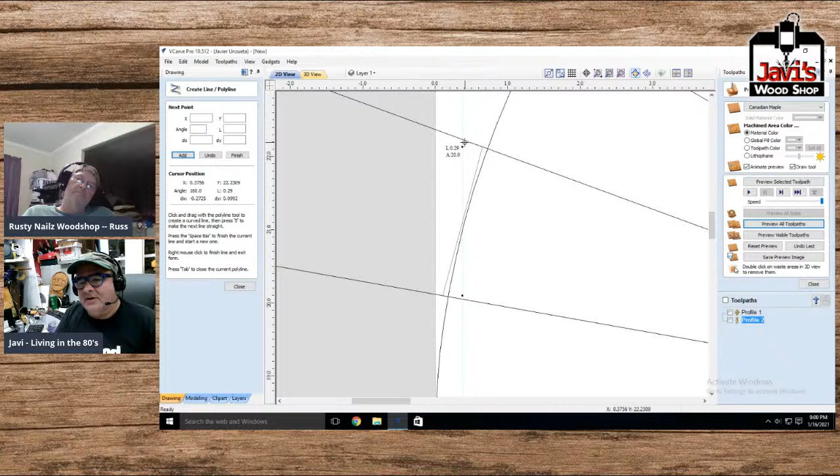And then, you got a bevel, and you got your square. So this is what those squares will look like, assuming that's a. Now, how big is that bevel? Well, guess what? We already did that math. It's 18 degrees, each one of these. Rather, I'm sorry, 10 degrees, 10 degrees is each one of these.

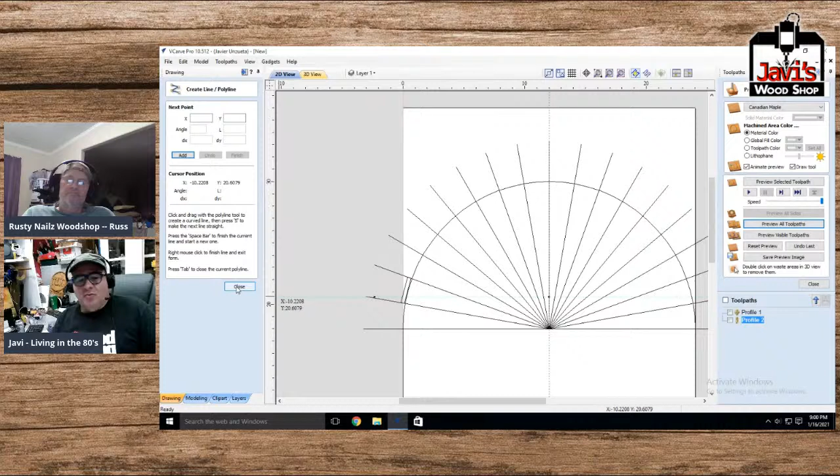So what if you were to want to make the perfect lid for this box, you need to find yourself a 20-degree V-bit. And they got them, some specialty places anyways. So I hope that helps people around there. It's simple geometry, but there's nothing simple about it.

We did have a question up there. Mako had asked about, yeah, unrelated to that, 3D carving, would a 2-flute or a 4-flute, which would be better? Consensus was 2 flutes. 2-flute, definitely, but for what is the question? That is correct, that was unspecified. The thing is, it depends.

You want the chips with metal. You want the chips to fly out and dissipate the heat of the blade. Yeah, you never want to be rubbing, and just have the heat build up, and then the blade builds up, and then it transfers to the shaft. The shaft heats up, and then you only go up for a second, but the shaft is still holding on to that heat. So as soon as you come back down again, you're starting from a high temperature.